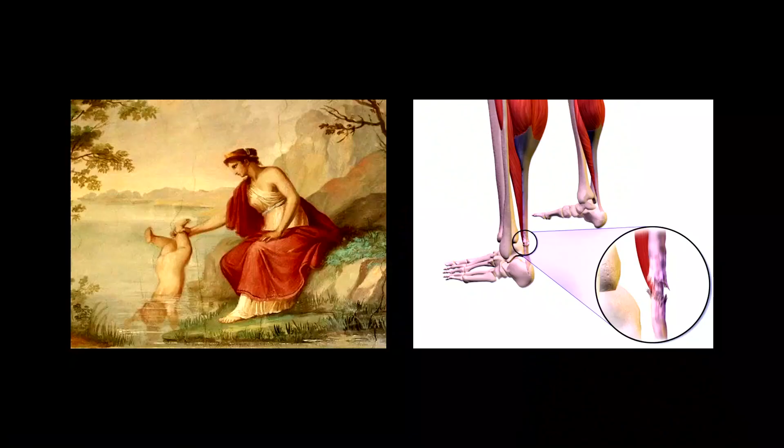Well, it's a pleasure to be here. 40 years since I was a student sitting in your seats, and it's really a privilege to come back to SCI-Arc. So you might notice I'm limping. I tore my Achilles heel and a tendon the other day. It's somewhat ironic that I'm addressing resilience with a frailty and a vulnerability.

It's appropriate that this Achilles, shown there on the left, I had to look it up. I mean, we all know the Achilles heel, but the great warrior Achilles was dipped into a river by his mother to give him invincibility and invulnerability. But where she was grasping at the ankle, he was not able to be wetted, and therefore was not invincible on the heel. So I thought that one spot of vulnerability is interesting.

It's been said that vulnerability is a birthplace of creativity, so it's fitting I speak to you in this creative community. The relationship also between myth and religion and constructs, which are the domain of humans, and science, which is the domain of humans understanding scientific facts in nature, is interesting. These disparate elements are also appropriate to the topic of how we often address life on our planet and how our built environment affects climate change.

From a science perspective, my tendon tear is a degenerative maladjustment due to inappropriate allocation of stress over time and in between stresses—essentially a structural failure due to excessive stress. Whereas anti-fragility would have taken the more reasonable allocation of stresses over time to build muscle mass instead of bringing this to the elastic limit. These stresses would have created a beneficial outcome. Too much stress on a system creates a failure. But you're learning this in structures class, that for equilibrium to exist, the summation of opposing forces must equal zero.

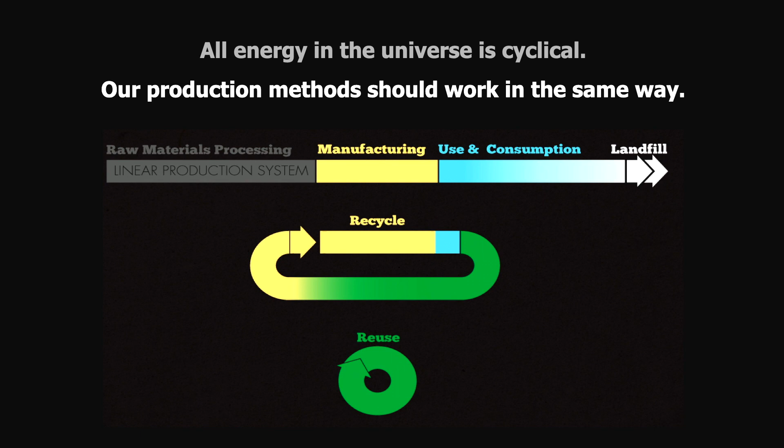Of course, a circular economy is a model of production, consumerism, and consumption, which involves sharing, reusing, repairing, refurbishing, and recycling existing materials as long as possible, rather than extracting new materials. So like biological nutrients in nature, our waste could also be used as technical nutrients in a regenerative, continuous system.

As it is for systems, it is for people. To survive in the future, humanity will need to adopt principles of circularity and systems thinking to develop materials and processes that are more organic and nature-based rather than synthetic.

It helps to use systems thinking, I think, rather than thinking in disparate parts. Systems thinking is a way of making sense of the complexity of the world by looking at it in terms of wholes and relationships, rather than splitting it down into disparate parts, enabling systems change.

Now, of course, buildings represent over 40% of global energy-related CO2. Now, I think in our lifetime, we've identified that the planet is sick, and that's the first thing—to identify the illness—and now to come up with solutions.

And certainly green buildings have been less bad by things like LEED and so forth, but we need to actually do more than reduce. We need to actually move towards restoration.

These reductions are certainly helpful, and we've made great strides in the creation of green buildings, but ultimately our buildings should give back more than they take. And I think that's a reasonable assumption that our technology can do that.

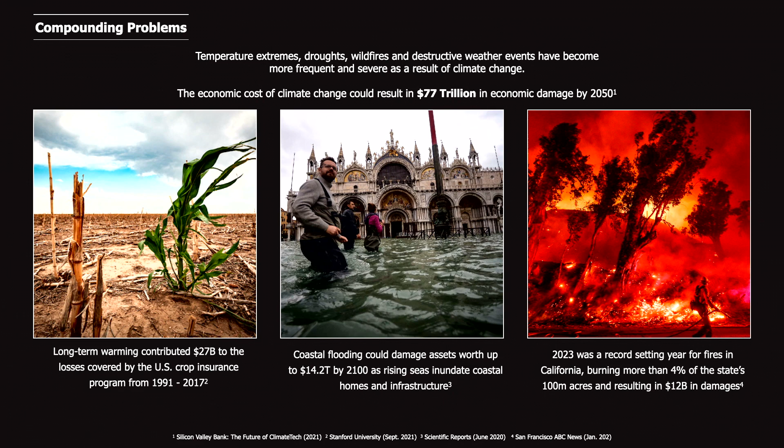So of course, we've had compounding events, and these magnify the intensity of climate change worldwide. Every year we hear we're breaking another 100-year flood. Every year, historic fires, unprecedented droughts, and they've had a cumulative impact and effects that are exponential in their repercussions.

We need to act now as CO2 levels continue to rise. 1.5 Celsius was the Paris Accord number. Now, these are happening at a much faster pace, and all scientists agree that is an inflection point in which it's going to be much more challenging to reverse climate change.

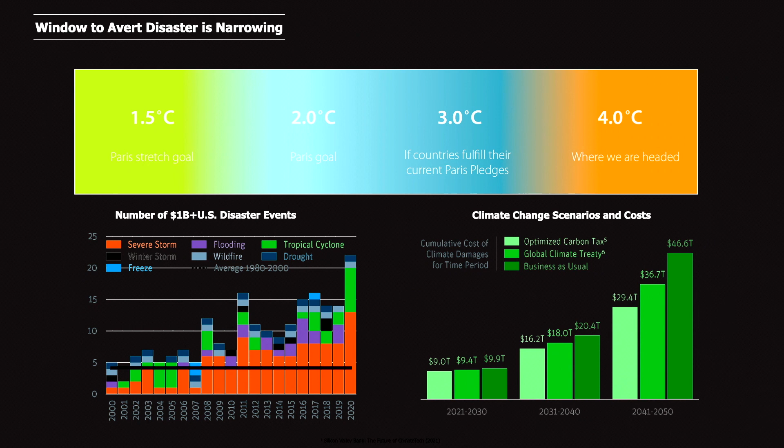And we're heading at this point faster and faster, possibly within the time you even finish your degrees. So the question really is, are we going to be a self-terminating civilization? I mean, there's been five mass extinctions already on the planet.

The dependency, of course, of water and food and energy are very clear. So I think we have an opportunity at this point, and it's a critical time. Never has the world been more vulnerable to our species.

The resilience imperative, the ecological imperatives of the 21st century, demand nothing less than an overhaul of our entire infrastructural systems and the way in which we design the future in an age of unforeseeable disruption. And so this is where you come in.

I'm going to speak more about this later, but I wanted to season the terms early in the presentation so you can marinate on them. Fragile systems are damaged by disorder. Resilient systems are unaffected by disorder, and anti-fragile systems benefit from disorder. So the anti-fragility of the whole often depends on the fragility of the parts of a system.

These terms, resilient, restorative, and regenerative, are such important terms. They're pathways. Indigenous cultures are the progenitors of a regenerative future. Regeneration means stitching together the broken strands that separate us from life and one another. That's a quote from Paul Hawken, an amazing author and visionary.

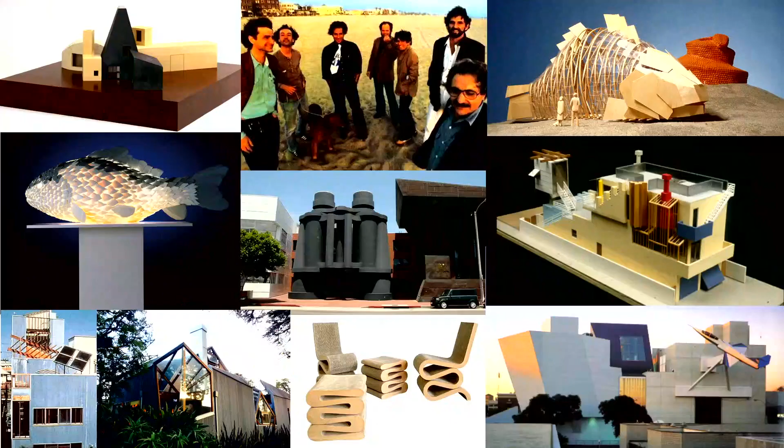I won a scholarship at SCI-Arc in my senior year to work for Frank Gehry, and worked in the Venice studio.

This group, known as the Confederacy of Heretics, on the beach there is Fred Fisher, Robert Mangurian, Eric Moss, Coy Howard, Craig Hodgetts, Thom Mayne, and of course Michael Rotondi, who's here tonight also, are incredibly inspirational.

These are some of the projects that I worked on at Frank's office - consistently different projects, a big push for the '84 Olympics, for the Aerospace Museum, but also breaking up color core Formica, and Frank's fascination with fish scales and snakes and other forms were very interesting, as well as his furniture work.

I also had the opportunity while living and working in Venice to work for different artists. So Larry Gagosian's gallery, designed by Craig Hodgetts and Robert Mangurian, shown in this upper left, was home to Jean-Michel Basquiat, and my job was to build stretchers for Basquiat and work with him for a summer, and it was quite an amazing experience.

But I also worked with Chuck Arnoldi, De Wain Valentine, Robert Graham, and full circle, I later purchased the building, the brick building right next to the Gagosian Gallery, as our architecture firm.

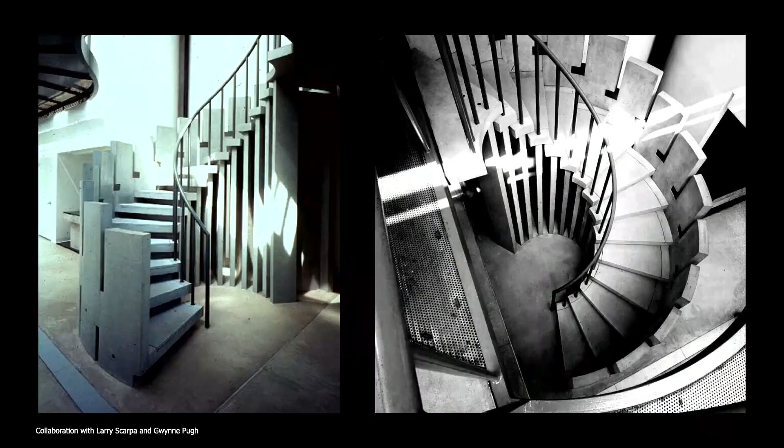I got to work with Morphosis on several projects. Some of my fondest memories are sitting with Michael Rotondi, watching him sketch and ideate, then fabricating some fixtures. This is a stair I did with Larry Scarpa and Gwynne Pugh, all prefabricated pieces.

But ultimately I began to feel the weight of my footprint in manufacturing, and it was somewhat of a reluctant product. I really started making things because I was looking for material that didn't exist in the market, and then got driven by the market into a larger entity that I felt run by.

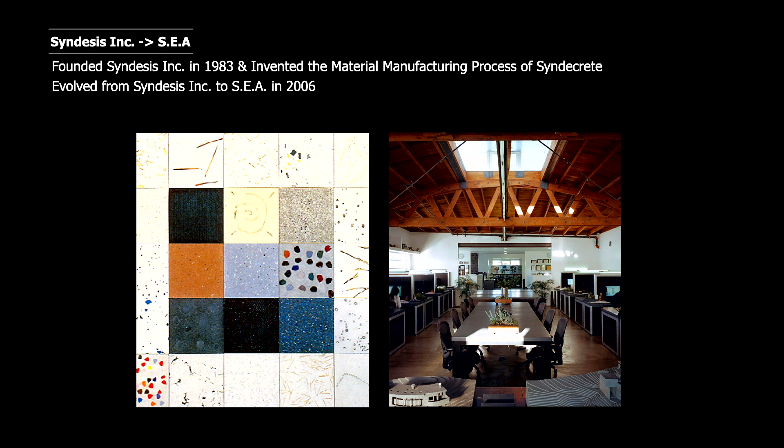So I sold that technology in 2006 and said I'm going to use the proceeds from that sale to continue practicing architecture until that money's all gone. Yeah, that's what it takes to practice.

So I started to focus primarily on how do I limit my footprint, and how do we create this sea change, alteration, or transformation. The work again became small scale, and the scales flexed - there's a little tiny trophy we designed for the World Surf League, and this is a launch control facility for SpaceX.

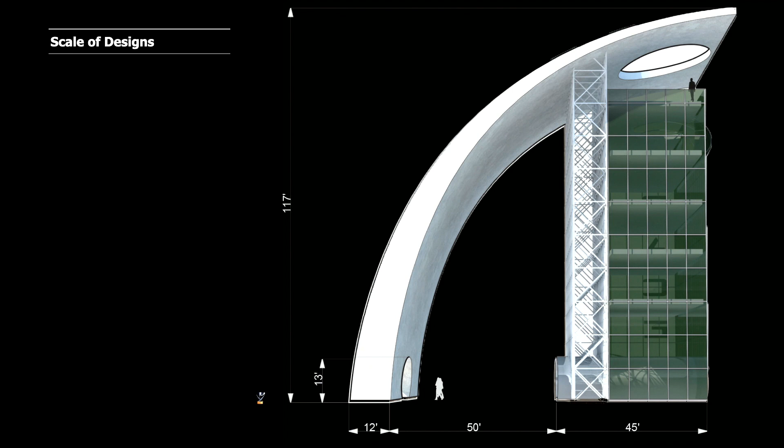So the scale of work can vary, but the general tenets are indoor and outdoor spaces, blurring the definition between indoor-outdoor to experience nature in a building, or when possible bringing nature into the building, either with a vegetative wall or a roof.

I'll go through a couple projects quickly since there's a lot and not much time. This is the first project I did in school, collaborating with Michael Rendler, who's here tonight. We drove after school on Fridays out to the desert outside of Reno, Nevada, to help build this house - a 55-acre site, passive solar, 100% off the grid. Until last year, the client occupied it, then passed away there.

This is an example of an early project. I was about 21, and we show it from far away because the contractor completely messed it up - the detailing was appalling. But that's one of the lessons you learn.

The second project, also with Mike Rendler, was an artist studio in residence in Venice. It was somewhat unique at the time because people weren't really using unfinished stucco, concrete, rusted steel, and block - it was somewhat of a fortress that then opened up inside.

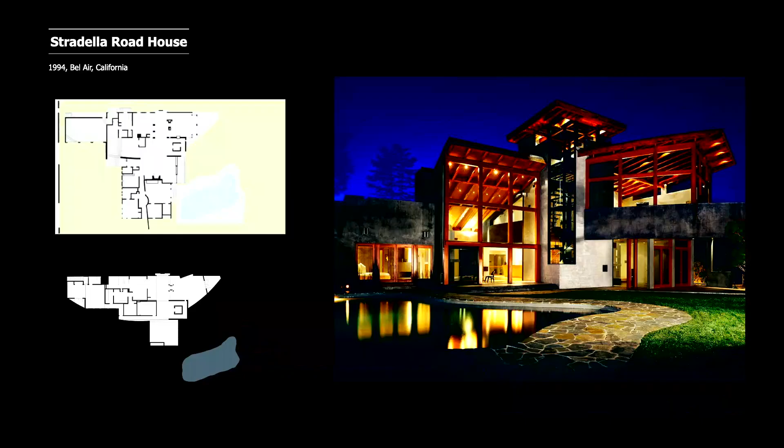Another project in Bel Air used a large gestural form to make a house out of reclaimed lumber and sustainable systems, including a solar chimney.

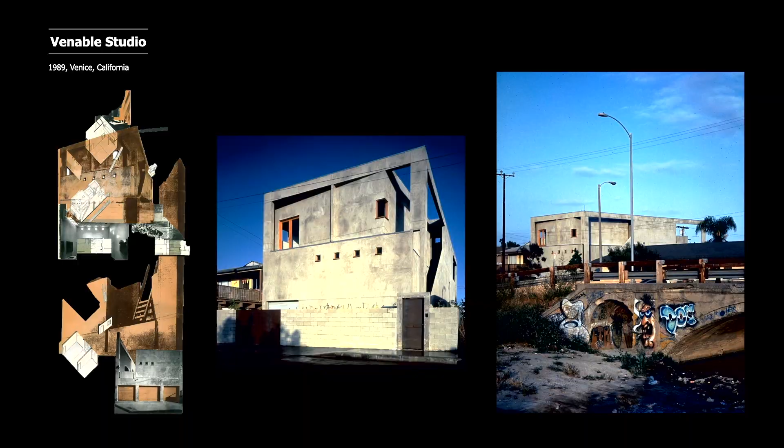A lot of the work also thinks in section, and thinks about the principles of natural airflow and ventilation, the use of a courtyard, the use of a bridge.

In this house, called the Californication House, I designed and built for my family, it was used as a principal residence in Californication. The other project featured was one of Ray Kappe's houses, so it popularized contemporary architecture in a way.

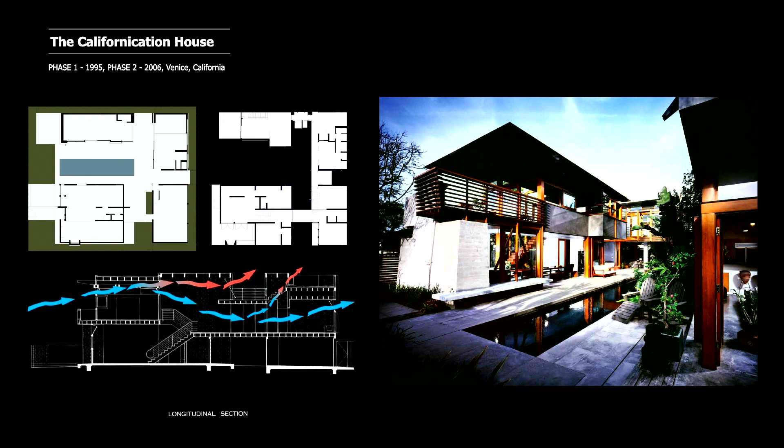It was built over two phases when land in Venice was inexpensive, and we built every aspect of it within our shop - furniture, fixtures, cabinetry, Syndecrete. It was about trying to create somewhat of an oasis within a small urban environment.

You could see elements certainly of Schindler and Kappe in terms of the use of reclaimed timbers. It also incorporated bridges, courtyards, natural ventilation, rammed earth, solar hydronic heating, and even living roofs.

A lot of the projects in Venice, this is a 32 by 80 foot lot, are so small that it's going to be a box. And how do you decorate the box?

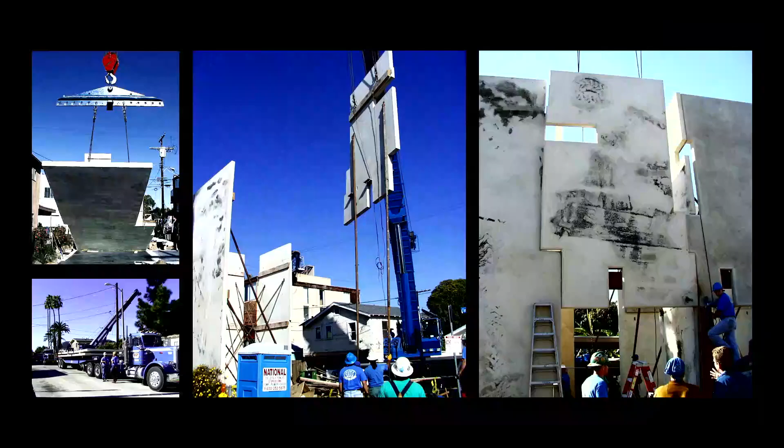So this is a project that was more tectonically inspired, and because I had so much experience with concrete slabs and pouring concrete slabs, I wanted to experiment with a house made out of prefabricated concrete slabs.

So 15 slabs came on trucks. They were cast off site only days before, trucked up. When the neighbors went to work, when they came back, all the walls were standing. It was one day, all the slabs were interlocked together.

And so these slabs could cantilever vertically. They were very, very durable, and they're made out of a titanium dioxide self-cleaning concrete that exfoliates over time as it gets dirty.

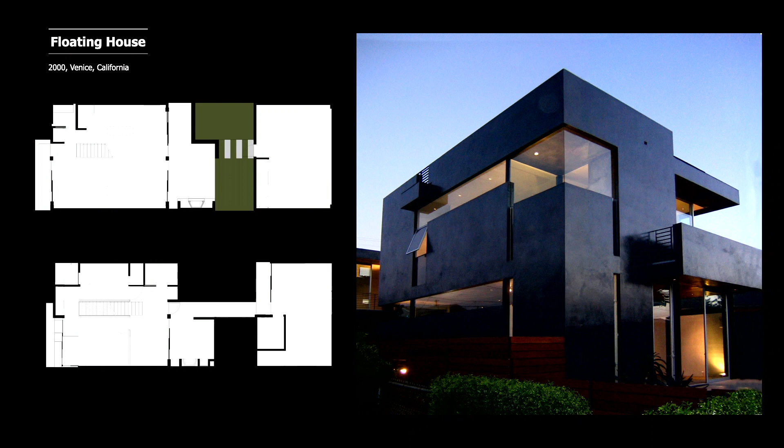Another box, let's take it as a solid mass and then make reductive gestures to carve away at it such that it essentially becomes floating.

It's connected between a bridge or breezeway around a large pepper tree, and we've just finished a renovation for clients that have restored it back to its original condition and bought it as essentially vintage and wanted it back.

But the idea was to have continuity of materials from outside to in, so the very polished steel troweled stucco ceiling comes out. So again, it has a cast monolithic feel.

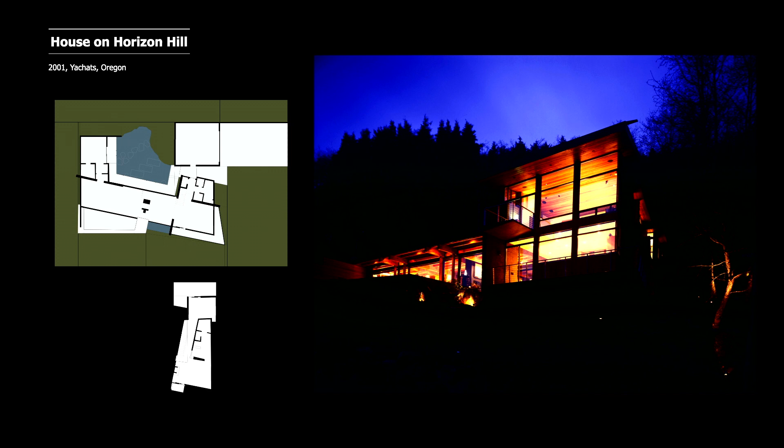In a house on a rural site in Oregon, on the Oregon coast, in a temperate rainforest, I designed a house out of concrete that we made on site using different variegated river rock, bonderized sheet metal, wood — all these materials to withstand 120 mile an hour horizontal wind-driven rain off the Pacific, but also that integrated into the landscape and inspired much by Japanese courtyard houses.

The water flowing down the hill actually accumulates and then continues underneath the entire house undisturbed.

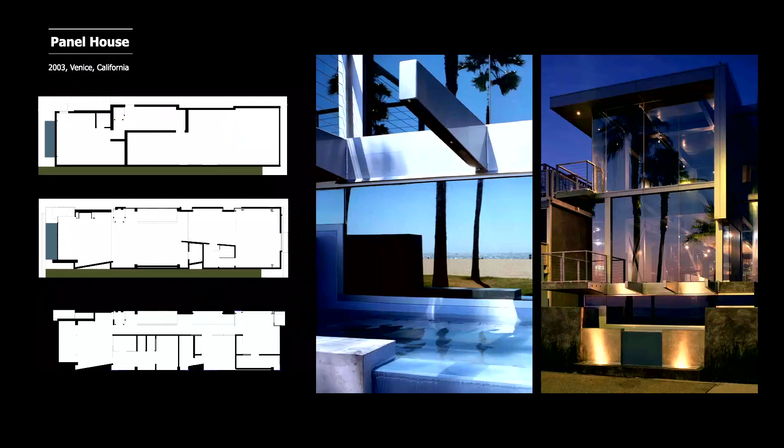Another, in this case, Venice oceanfront walk property, a very long and narrow property. The goal was to open the house even from the back all the way to the view and to really experience the ocean.

And so this window that you see here on the right is on a custom screw jack. The screw jacks can lift and lower the window, and then inflatable seals are used to seal it against the wind-driven sand. So here you can see the window comes down to a railing.

And sometimes I've been riding by on the Venice boardwalk, seeing my client who has the biggest suntan of anybody I've ever seen, because he sits in his living room in the sun throwing footballs through the front window to passersby on the boardwalk.

But the house was made out of a refrigeration panel system of insulated stress skin panels skinned in aluminum. All of these panels came on a truck.

The structure itself was post-tension concrete and steel, and then the walls have no bearing capacity. So they went up very quickly.

They're coated with a Kynar marine finish and still holding up quite well.

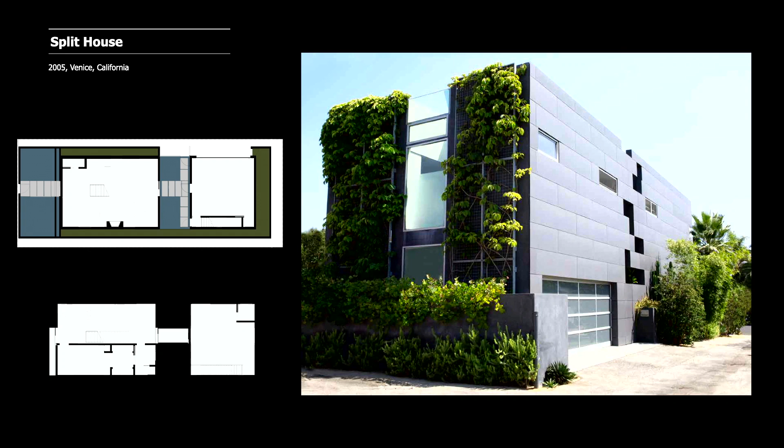In this case, splitting it down the middle to create essentially a continuous skylight and vertical window, playing with cementitious panels, and then covering the courtyard to the adjacent street, but taking away the pieces such that there were views from the breezeway that connects them and the water court below.

A house that is an addition to a Gerald Lomax house. Jerry Lomax worked with Gregory Ain. It was a very orthogonal modern house. And so to honor that work, I wanted to make a distinctly different addition that sits on top of it.

And so I used more curvilinear floating roof forms and pushed the building out with frameless glass such that the client in that bedroom was really connected to nature.

And I feel from all my early work in the Syndecrete days, building bathtubs and showers out of concrete to bring them inside and outside, was to have something primal about bathing that connects you back to nature and the natural world.

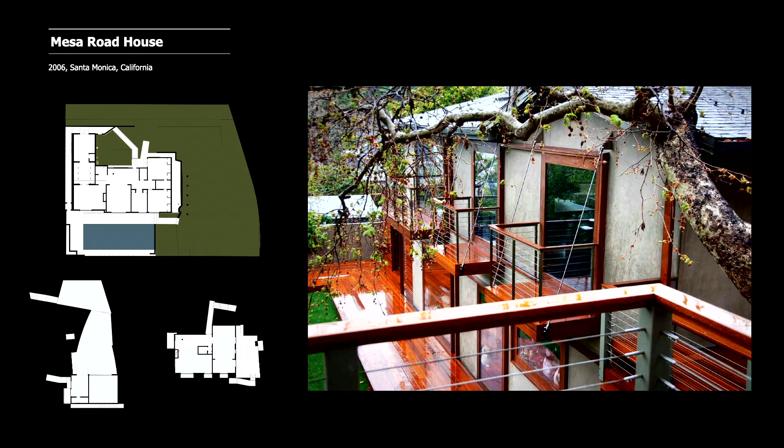In this house in Santa Monica Canyon, it is completely based upon an existing stand of sycamores and how we could make it feel like you're living within a grove of sycamores, made out of FSC certified and reclaimed hardwood, designed the front door.

This house was built by Epic Construction, and the panel house was built by Ron Senso. I've worked with these craftsmen and builders off and on for different projects. Here's a sink designed out of wood, a folded ceiling plane, and millwork as well.

In 2007, after I sold my Syndecrete company, I bought a little abandoned Mexican restaurant and market right on the corner of 20th and Olympic, and renovated it for our office. It was the highest rated LEED Platinum building in the country at the time.

It became a laboratory for me to experiment with passive ventilation, active daylighting systems, and solar generation, as well as to work with the green roof.

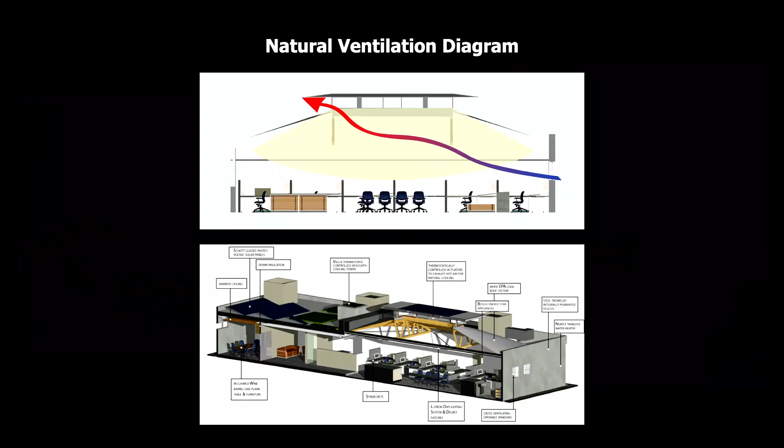We created a green roof research station that became the formative research for the California Academy of Sciences building in San Francisco. We played a lot with how you shade green roofs using solar, cool the solar panels to increase efficiency, and use reclaimed water to wash the panels down, which then waters the green roof.

A Buff and Hensman case study house restoration down to the foundation, and an addition.

A project for the Thacher School, a private school in Ojai, done in collaboration with Yato Suzuki, who I think is also here tonight. We've been collaborating together for about 20 years. This property had about 32 dormitory rooms, commons, and faculty housing.

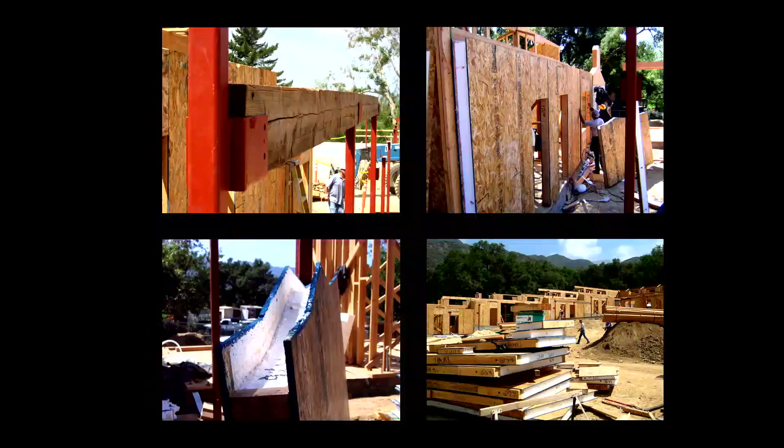It was made out of reclaimed timbers and stressed skin panels. The whole building was prefabricated—doors, windows, roof, walls—and it was also solar radiant heated, which is still one of the more comfortable dormitories, I'm told, from back when Howard Hughes was a student there.

In this project, there was a very typical tilt-up concrete building. My aunt and uncle—I believe my Aunt Merle made it through traffic tonight—she's still racing and showing cars around the world, but has a collection of French race cars that really preserves this art of motion.

I used the inspiration of reclaimed windshields to form a canopy, reoriented the building on its axis, and then opened it vertically with stairs, utilizing solar on the roof and a green roof for entertaining.

So like our planet, islands make you very aware of the finite boundaries.

This was a project in the Marshall Islands, very remote and intact. It's in fact one of the most pristine ecological regions because it was one of the most polluted ecological regions from nuclear tests by Bikini Atoll.

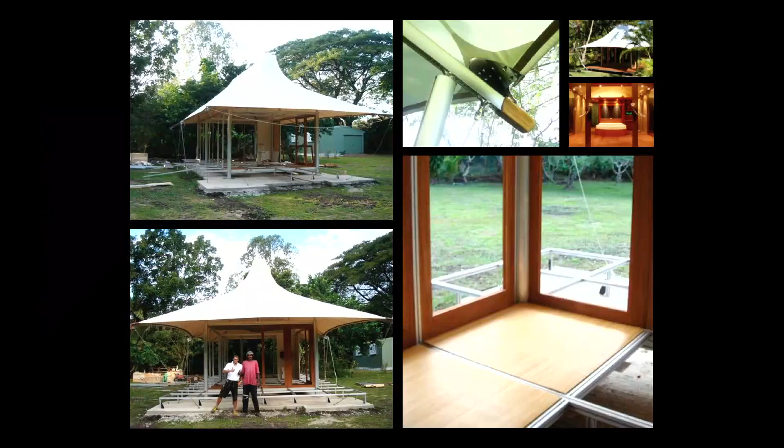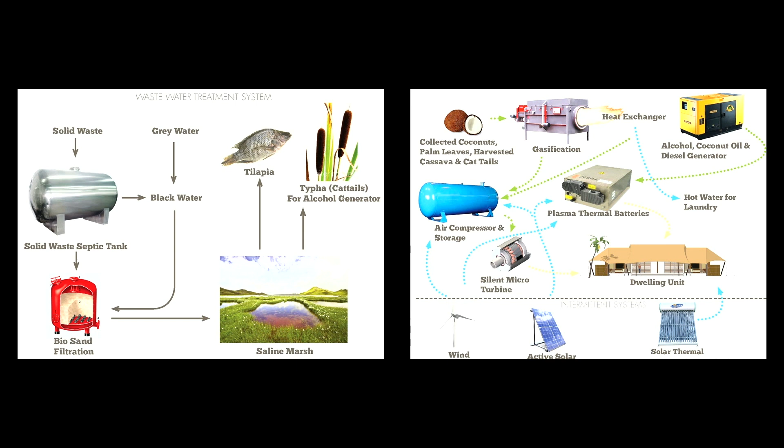Prefabricated aluminum pieces and tensile membranes capture 100% of the water and employ 100% of the waste in an ecological system, generating power from the biological materials available on the island—coconuts gasified to make heat, which then run pneumatic turbines to power the buildings.

I've also been very interested in radical reuse and repurposing. This was for a marine mammal rescue facility at the base of Dockweiler Beach.

I was interested in the thousands of battleships that are desiccating and exfoliating their lead and toxins into the San Francisco Bay. They're chained together, and in researching what to do with some of these ships, I found a floating barge that was used for the Glomar Explorer—a stealth ship called the Sea Shadow.

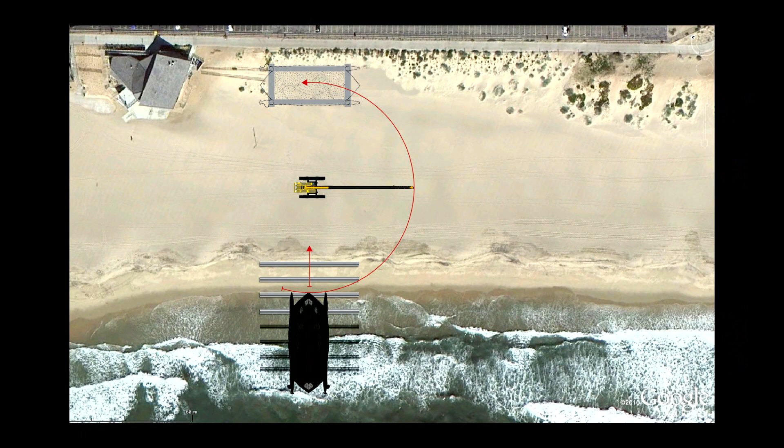This was being sold for salvage. My concept was to purchase that ship, bring it down to the beach, crane it into place, and elevate it so it would work as a marine animal facility at the bottom and offices up above at night, giving you the stealth-like form against the horizon.

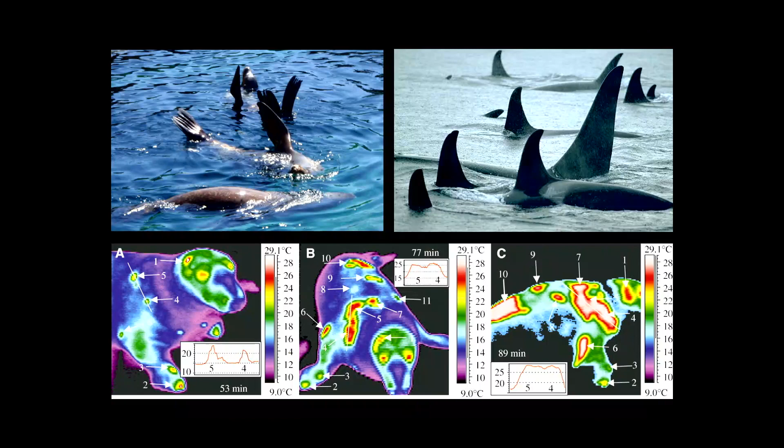I was inspired by thermoregulation, which marine mammals use to regulate their temperature—they use their dorsal fins to either gain heat or discharge heat. That became this rudder, a movable rudder that would in part self-regulate.

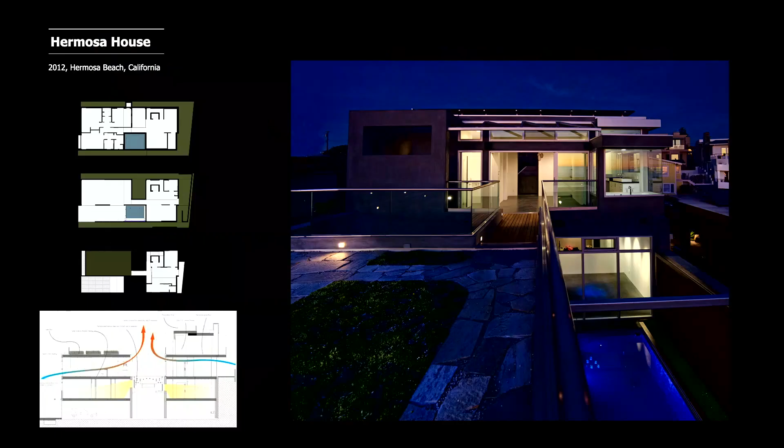Going quickly through a couple of these other houses: in the house in South Bay, we craned a stainless steel swimming pool into the third floor and opened that up to the bottom, trying to still make a very tight urban house somewhat open.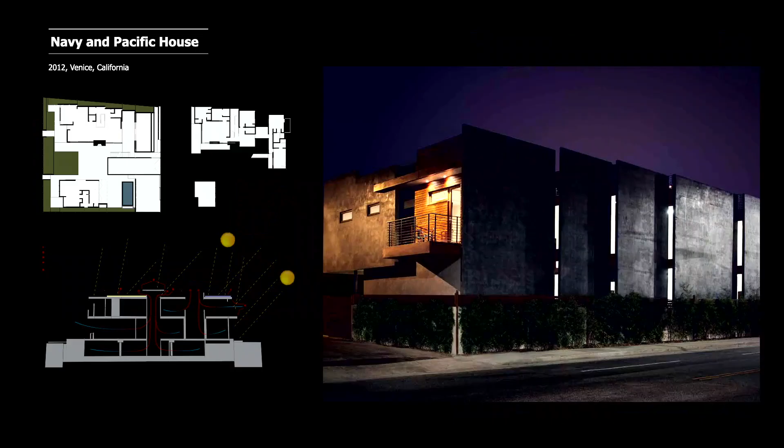Another house in Venice becomes somewhat of a gateway—it's the first house in Venice on Pacific and Navy. The idea was to create a series of fins, a very solid wall on this very loud street, almost like fish scales or shark scales, seen one way as monolithic and another as variegated, allowing light through.

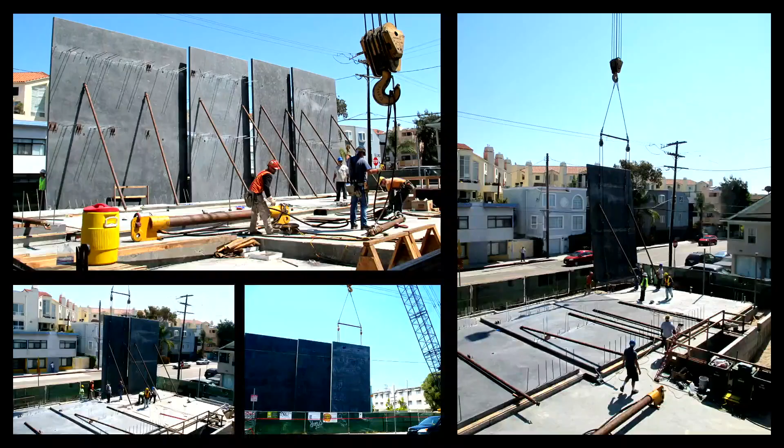In this case, we had enough room because we built a subterranean garage, then poured the slabs on that garage and tilted them up, and built a house which was far less solid and open to a courtyard as it extended inside.

Now it's clad in bamboo and one doesn't even know they're on that busy intersection.

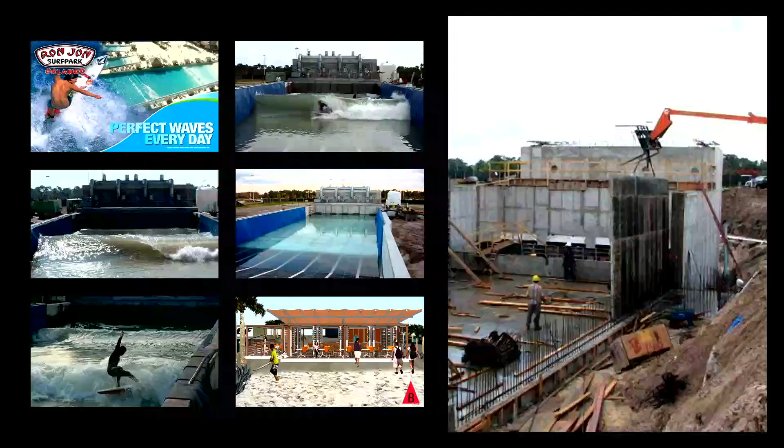I had some interesting opportunities working with the 11-time world champion surfer Kelly Slater. He bought a patent for an endless wave in a circle, so I did some visualizations on what that could be. Then for another company, having this unique experience in man-made waves, we built a test pool for one in Florida. The idea was similar prefab structures that would support it, but also use the wave energy for harnessing power, to use solar energy to cool surfaces and heat other surfaces. So I became very interested in the systems around that.

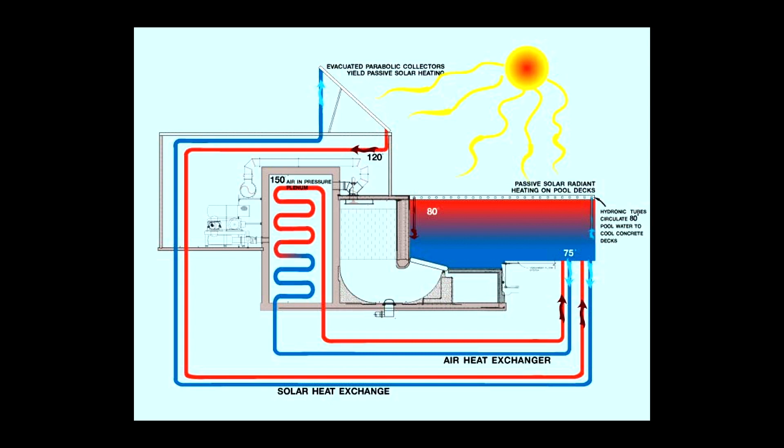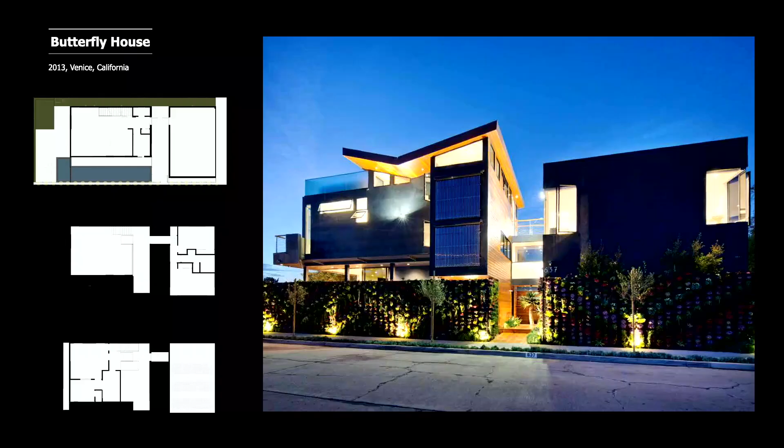Last year, I got to surf this man-made wave in the middle of the California desert. That was quite interesting—man utilizing technology to recreate nature in some ways, but not as an alternative or in place of nature, but as an augmented nature. A lot of my work tries to make overt expressions of mechanical systems, or to still make spaces that open up to the outdoors or interior.

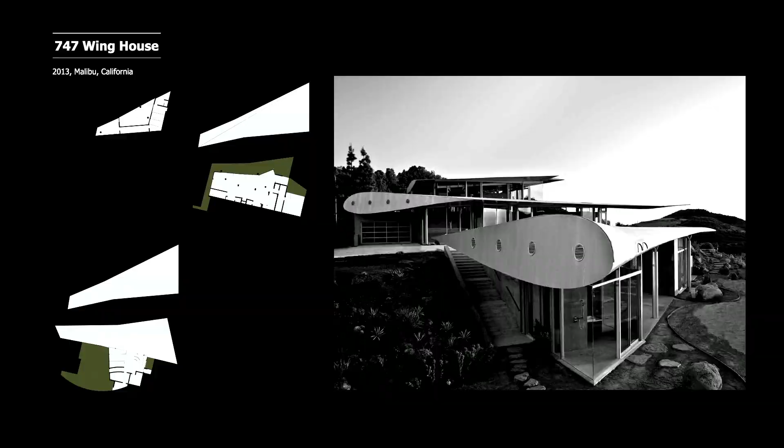So the process of radical reuse and repurposing, we talked about a little bit. Upcycling is, instead of something that's downcycled. In this case, a property in Malibu—my client, Francie Rewald, is here tonight, and to her credit, allowed me to generate a concept about floating wings. The initial idea was to just have these Lautner-esque wings, and then I thought, why not just use real wings? This cross-section reminded me of the laminar flow shapes.

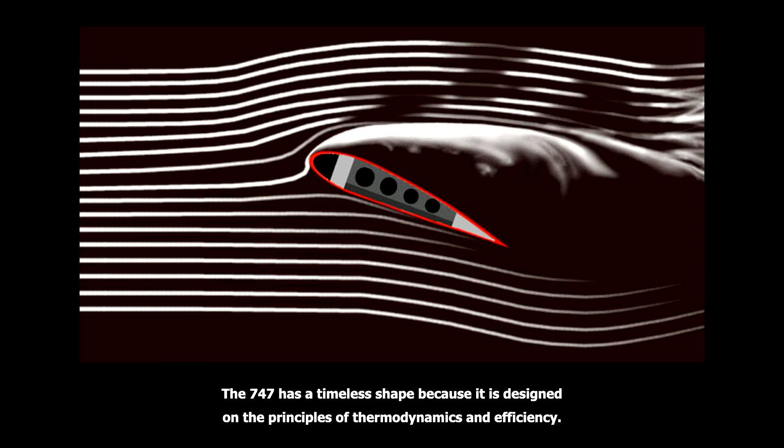A 747 is timeless, especially compared to anything else of its era, because it's shaped by the laws of thermodynamics and efficiency. It's an incredible structure—Norman Foster really refers to the 747 as a building. But when you think about the billions of dollars of research and engineering that go into making something so efficient, lightweight, and strong, it's a shame to have it downcycled into a beer can when it could be reused as a building. There are thousands of these airplanes desiccating in the deserts of obsolescence in California. I remember seeing them, perhaps you've seen them too, as you drive on the 395 or out of Mojave.

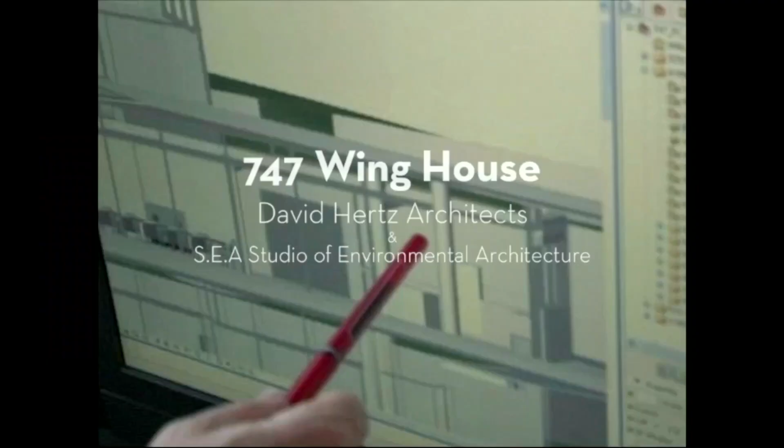So I convinced my client to buy a 747, and to her credit, she did. She said, let's go look at it, and we went out and looked at it. I'll show you now, because it's easier to describe this way—we clipped together some video footage and sped it up. It's a little slapsticky, but it goes faster that way, and it does show the process of making this building.

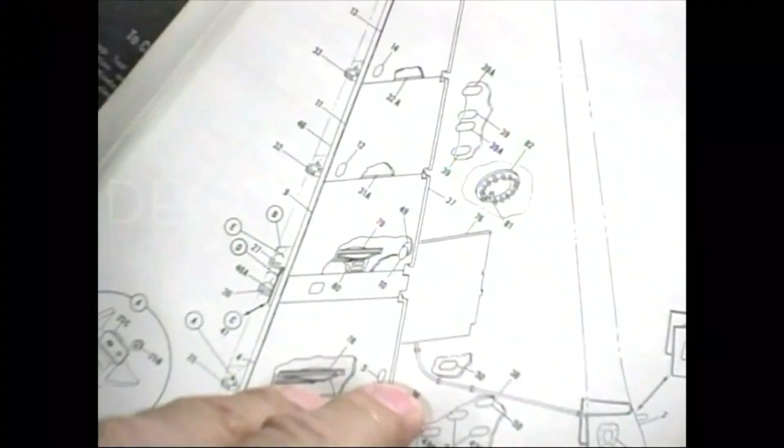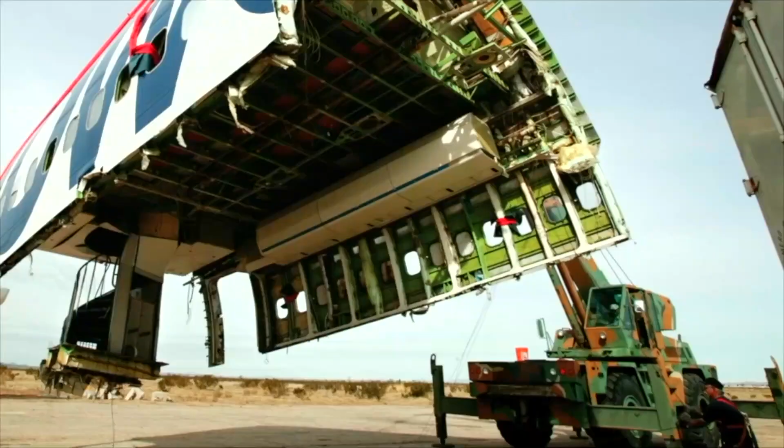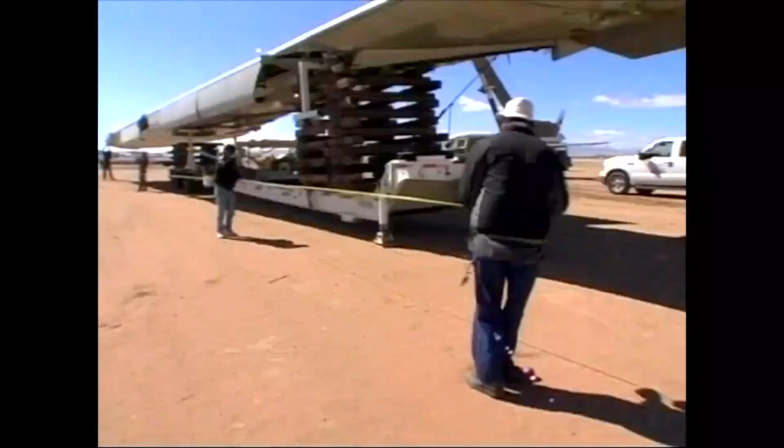The idea basically is that these wings are like tabletops. This Tower Air plane was a 1977 747-200, set for demolition. We cut it in half lengthwise and then lifted those fuselage sections off—we actually were drilling the piles on Friday for the fuselage building on the property. We then took the wings, rigged them for transport, closed 5 freeways, and took them to the Camarillo Airport, where we cut them in half, closed the runway, and used a Sikorsky Sky Crane helicopter to bring them to the remote site.

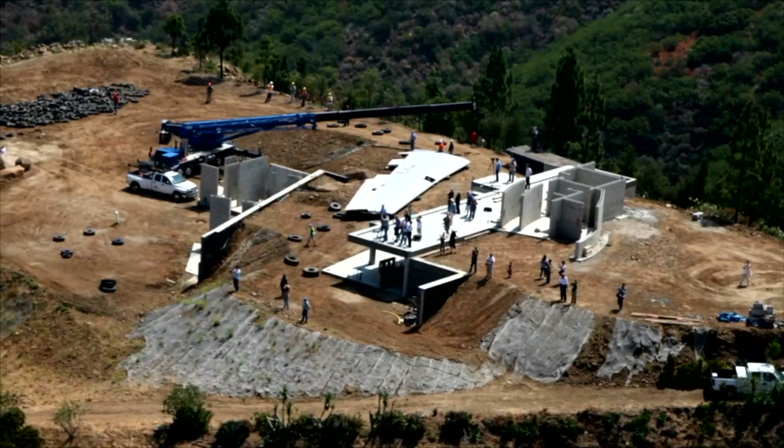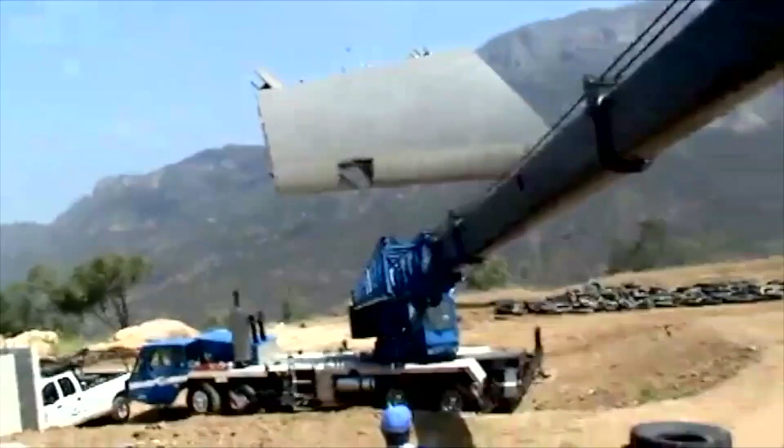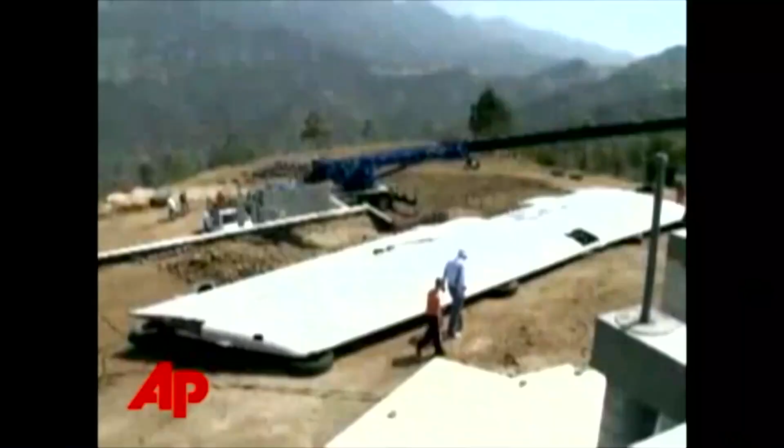Now, one would say, how is that environmental? It's a huge burst of carbon in a two-hour time frame—so it's a large inputs, less time strategy. This site is very remote. If we were going to make this as a conventional building, we'd have thousands and thousands of trips of disparate pieces that would come, none of which would fit, and 30% of which would end up as construction and demolition waste. So this idea of repurposing rather than usurping primary raw materials from the planet—especially aluminum, which has one of the highest embodied energy costs with the largest life cycle cost.

So the finished project—I'll go back quickly—but that's also perhaps best seen with video, because like Lautner would say, it's hard to photograph good architecture because it's a dynamic experience, and the interplay between the roof forms is part of what makes it so interesting.

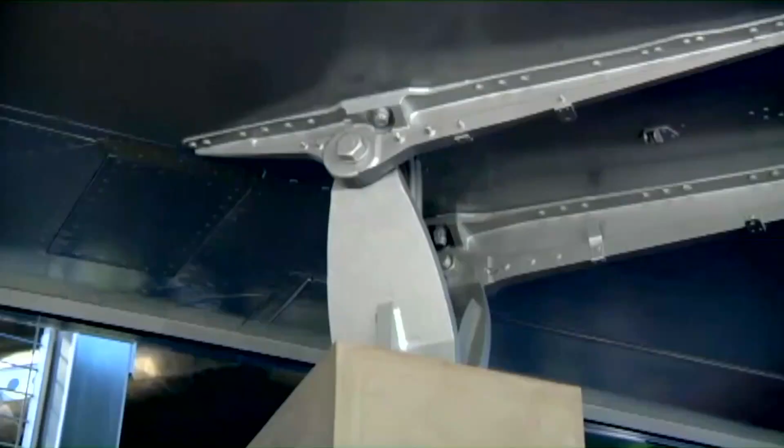The wing starts at 8 foot thick as it hits the root of the plane and goes down to an inch in thinness. It's an incredibly graceful and strong monocoque structure, and we employed it so there was an interplay between the wings - the lower guest wing, the main wing - and the primary bedroom is made from the horizontal tail stabilizers. We reached up and grabbed them at the engine mounts of the strong part of the wing, and expressed that hardware and the finishes - the rivets, the polishing of certain surfaces, the painting of others, the leaving of other portions of the wing.

The engine cowling acts as a fountain with a fire element to form a courtyard, and the wings make a forced perspective towards the horizon, towards the Channel Islands and the sunset. Because the property is on a ridge, it integrates very nicely into the ridge, but also gives you the feeling that you are flying, because you're looking out over the wing as you would as a passenger.

So it speaks to recycling, radical reuse, but as a progenitor of form. Not, oh, we'll put a solar panel on it, but really, how could that become the basis of design?

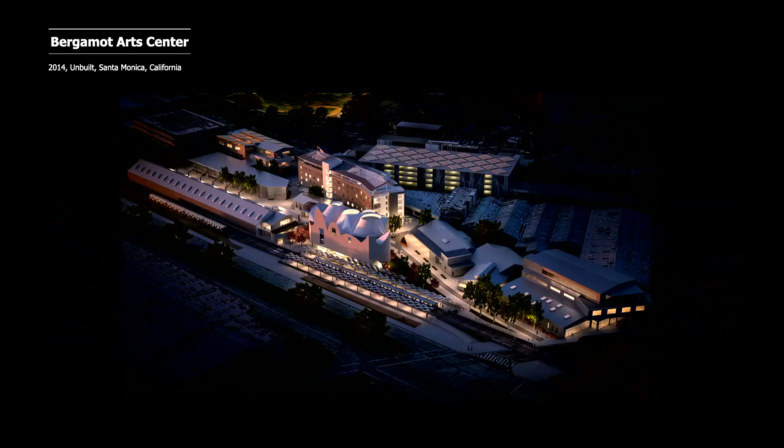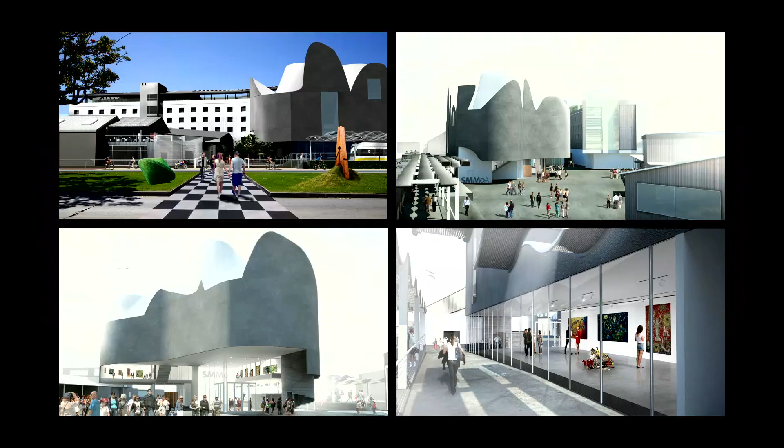Another project, unbuilt - I was shortlisted for an art center in Santa Monica, the Bergamot Arts Center. It was to include a hotel, a new museum, parking, and artist housing. I collaborated with Michael Maltzan, who did this beautiful floating design for the Santa Monica Museum to address the Metro Rail. So it's essentially a Metro Rail stop where art is just viewed right from your seat in the Metro Rail, which then encourages you to get off.

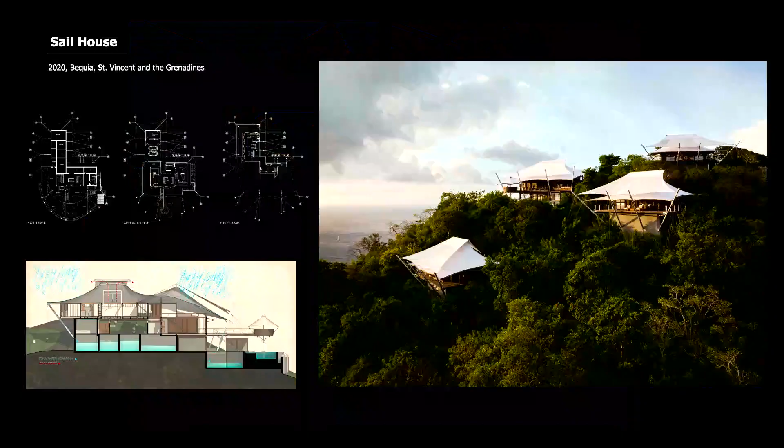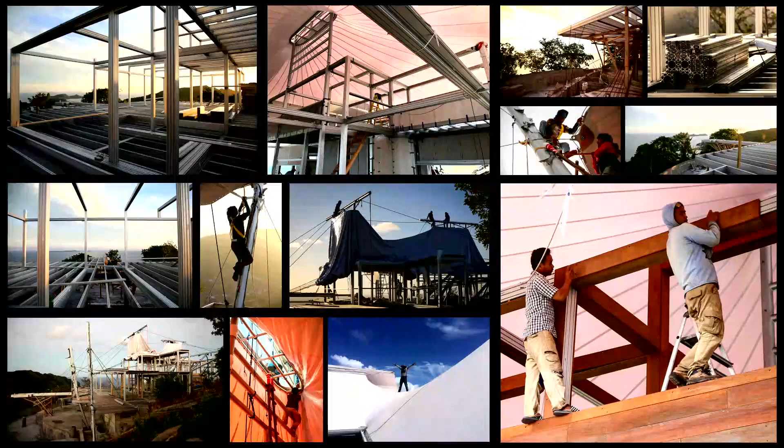As we wrap up, I've got a house I recently finished on the island of Bequia—an incredible house. In a perfect world, architecture lets you work with amazing clients who give you latitude and involve travel and other experiences. We chartered a Phinisi, a traditional Indonesian vessel, found a pier in Borneo abandoned out of old ironwood, and designed the house out of extruded aluminum sections.

This island is very remote, near Grenada. My wife Laura and I sailed from Grenada to meet my clients, who sailed down from Bequia for the first time—we met on boats. Everything coming to this island arrives by boat, so the embodied energy is significant. How do you do that efficiently?

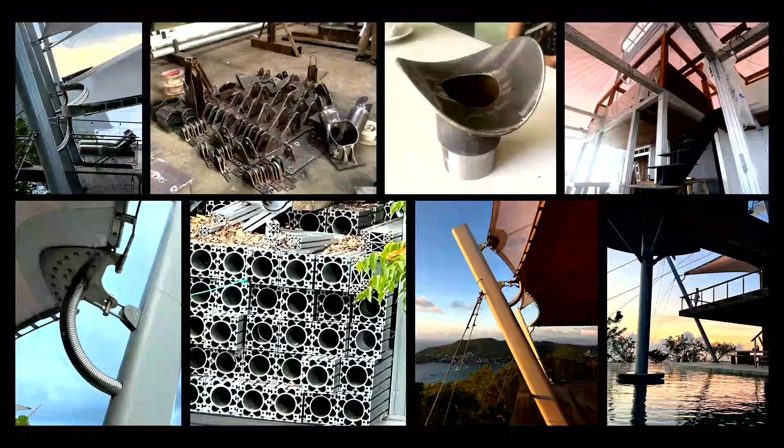Aluminum—recycled aluminum extrusions. There's no way to not make it square. They go together with one tool in a kind of flat-pack arrangement. There were 15 containers with very little empty airspace in them. They're clad with reclaimed lumber so they retain a wooden feel, but have a hollow aluminum section for mechanical systems. The entire building was built in Java and completely assembled—we went with the clients. Every light switch, plumbing fixture, and finish was completely assembled, disassembled, barcoded, shipped, and reassembled.

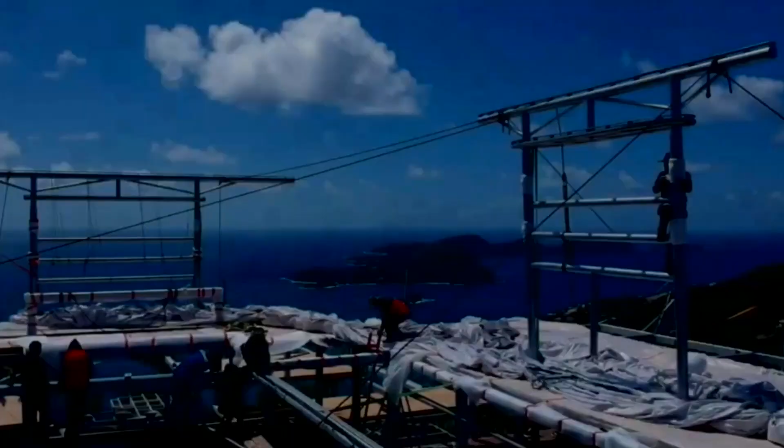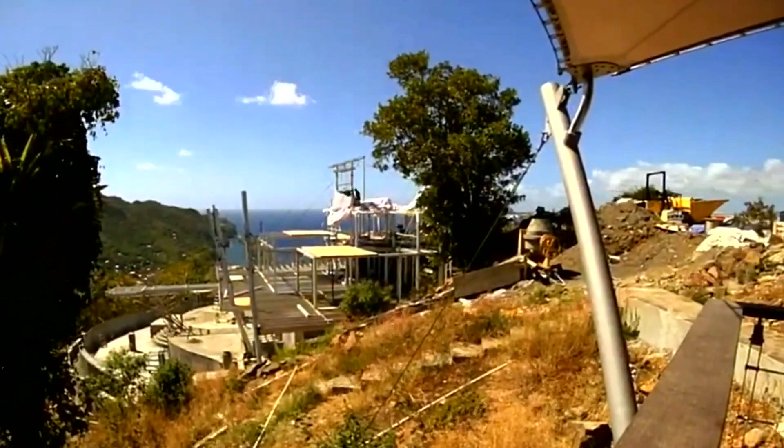The Javanese craftsmanship was amazing—the ability to use natural materials like woven palm and coconuts. We also have video showing the steel frames and aluminum structure. The entire building is resistant to termites and mold.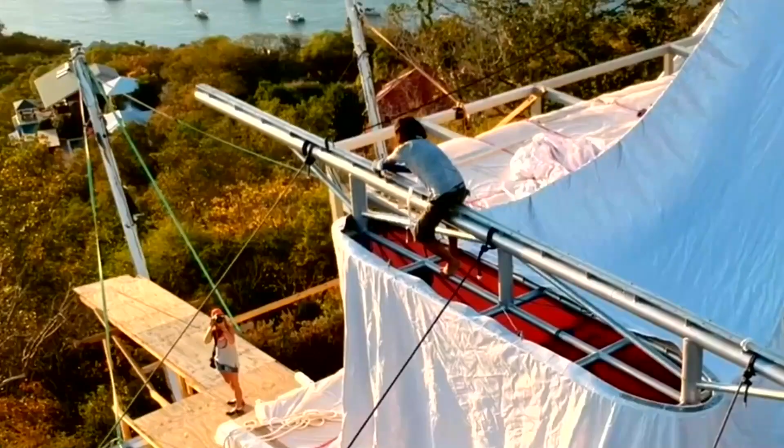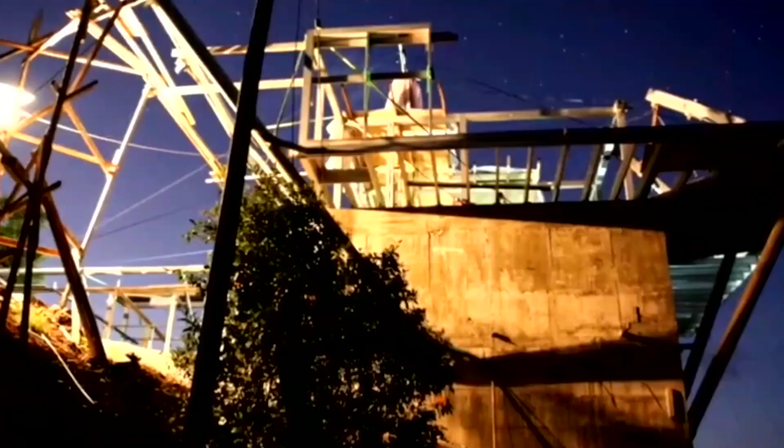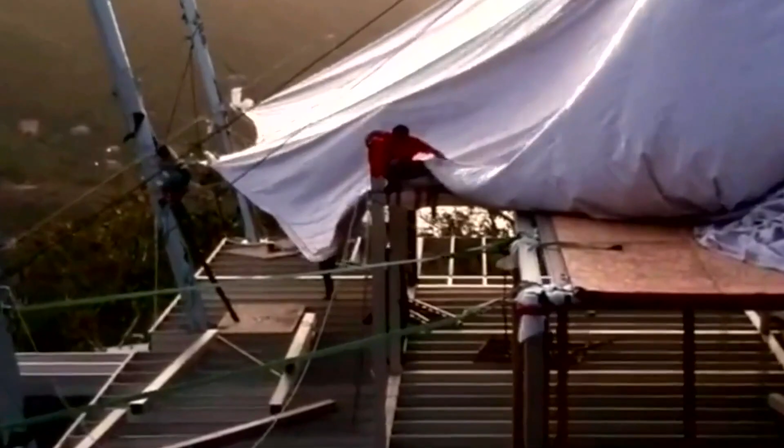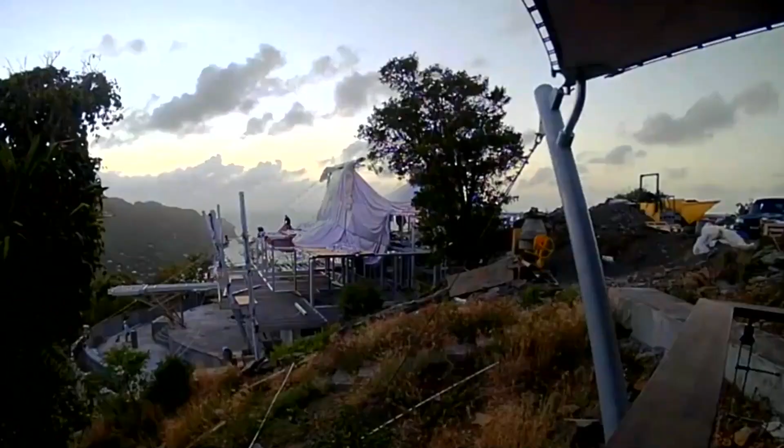It has a large roof area, needed in the Caribbean for large overhangs against the low sun. The roof took up very little space—it was unfurled much like a sail. Large masts were custom extruded out of aluminum, and sails were draped over them. Javanese workers worked alongside Caribbean workers, German engineers, and British clients in a truly international project. Eric Lindemann, who's here tonight, was the project architect—we've worked together for about 20 years. We also worked with Toma House in Bali, Stefan Schilly and Frank Toma. It was an amazingly collaborative and cooperative effort.

In terms of the roofs: there's no water and no energy on this site, so the roofs collect 100% of the water. They funnel it into the corners at the mast, and the water is brought into the foundation—a big hollow concrete box filled with hundreds of thousands of gallons of water. They get tremendous amounts of water in short periods and then none for long periods.

The long overhangs were created by a tensile membrane, with reclaimed wood sitting on top, which we also use to make louvers. The house is basically all completely open—no mechanical systems, all naturally ventilated, but it can be closed up with louvers directed for airflow. It's best seen from a drone; it integrates nicely into the landscape, with a large ironwood pivot door.

The series of buildings includes guest houses, somewhat like a bed and breakfast, looking out over the island chain. There's a large pool that's again 100% collected rainwater. The views and capturing the prevailing breezes make it very habitable.

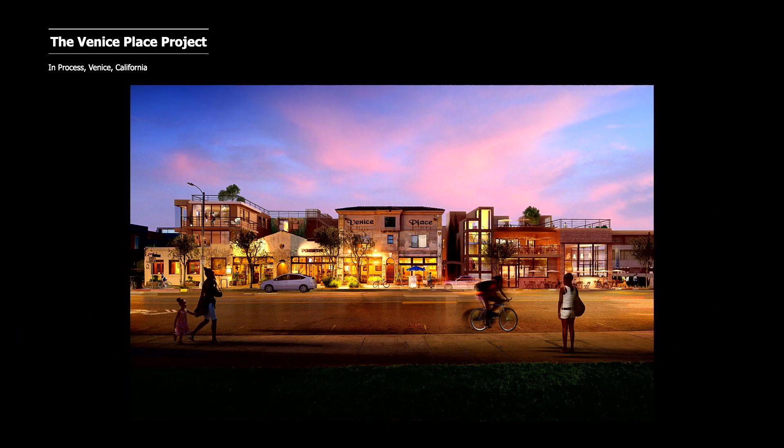A project just in construction documents now in Venice is a hotel on an old railroad right-of-way on Abbot Kinney. It seeks to open the restaurants to a large public courtyard and tries to break up the mass of the buildings into a series of buildings with courtyards and bridges.

Just finishing the NRDC office—it was the first LEED Platinum building in Santa Monica, and now it's being positioned for the living building challenge, 100% net zero energy. We have a floating solar canopy roof. Worked on this project with Ed Milan in my office.

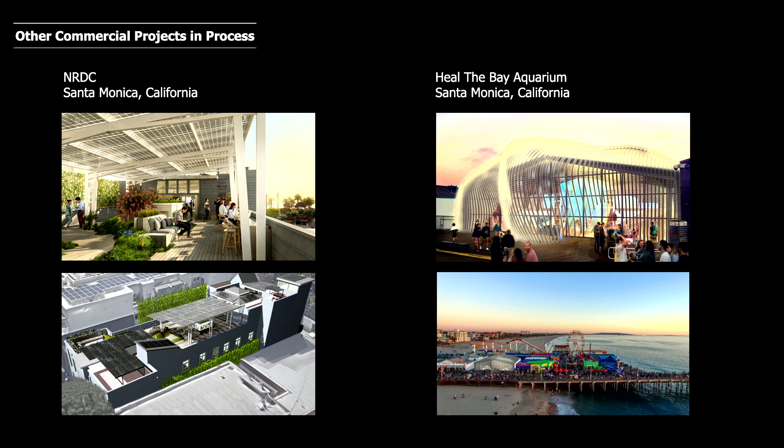I started playing with atmospheric water generation on the rooftop of my office on Market Street, hired an artist, and put in a bottle filling station.

My wife Laura and I started giving water away for free to the community during the middle of the drought. The idea is, why should the commons, water, be privatized and sold to us by corporations in plastic bottles where there's more plastic than plankton in the oceans? Why shouldn't water be free? It's about the democratization of water.

Around that time, the XPRIZE, which was in part funded by Elon Musk and Peter Diamandis—that's what got Lindbergh across the Atlantic, it's an incentive prize—asked: how can we take nascent technologies that have not emerged yet and make an audacious but achievable challenge? So the challenge was a global challenge of how to address water scarcity by making 2,000 liters of water in 24 hours at a cost of less than 2 cents, and it had to be 100% renewable energy.

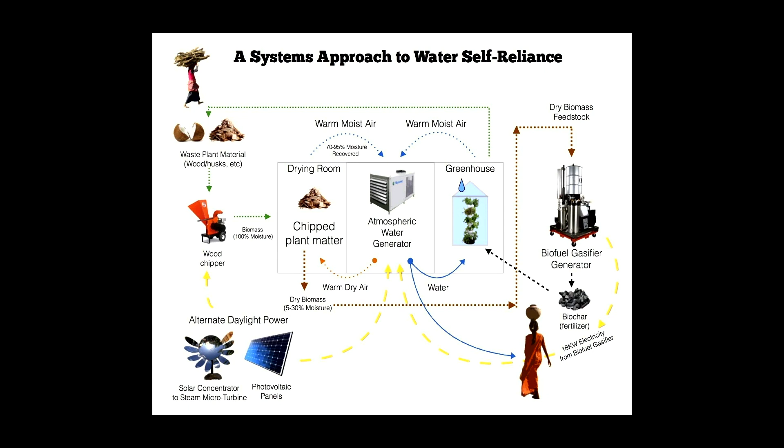We started to really look at this, and ended up building a machine to do a 72-hour test in Berkeley, California. We worked with some Stanford dropouts—one famous for burning down his dormitory exploring with pyrolysis, Jim Mason here, and his All Power Labs in Berkeley, a kind of renegade group of visionaries from Burning Man.

We had very little time. We didn't have time to raise money. We were actually excluded from the competition in the late phases, only to be entered back into the race with no equalization. So rather than coming at it from behind, we thought, well, now we have a stealth advantage. But to do this, we took out a $1.5 million loan on our house to fund it. And thank God we won.

Willem Swart, who I think is also here tonight, had just kind of entered the office and had a trial by fire learning how to sleep in a chair while working through the 72 hours. It was a huge test of the technology and the idea.

We won a number of awards, but it's not about the awards. It's about how we're going to address one of the fundamental crises on our planet, which is water scarcity. By 2030, water demand is going to outstrip supply by 40%. This is a massive problem. There's going to be a force multiplier that forces migration, warfare, and other things. I mean, besides air, what other hierarchy of needs is there besides water?

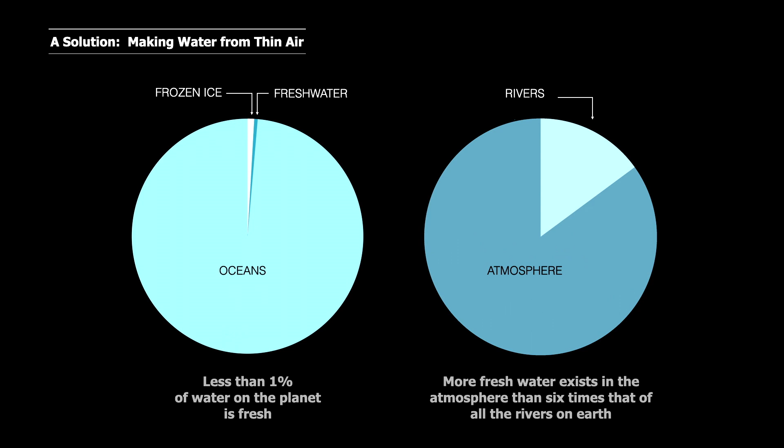However, six times more water exists in the atmosphere at any given time than all the rivers combined on the planet, in vapor form. You see it—those are clouds, that's fog—but there's also water vapor that you don't see. So Laura and I formed a company called Skysource to leverage the technology we used in winning the XPRIZE to make the WEDEW, which stands for Wood to Energy Deployable Emergency Water. It uses iconography symbols—alchemical symbols of earth, fire, and air—to make water.

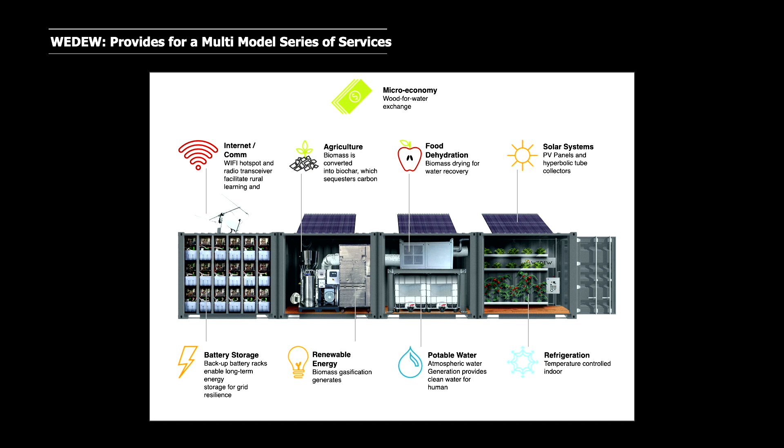They're in ruggedized, disused shipping containers that are easily transportable and have a series of different multimodal functions to them—a full suite of interchangeable and integrated kit of parts. So not only water, but high-density electricity, battery charging, cooling, communications, and rural learning. We see these as community resilience hubs, especially in the developing world.

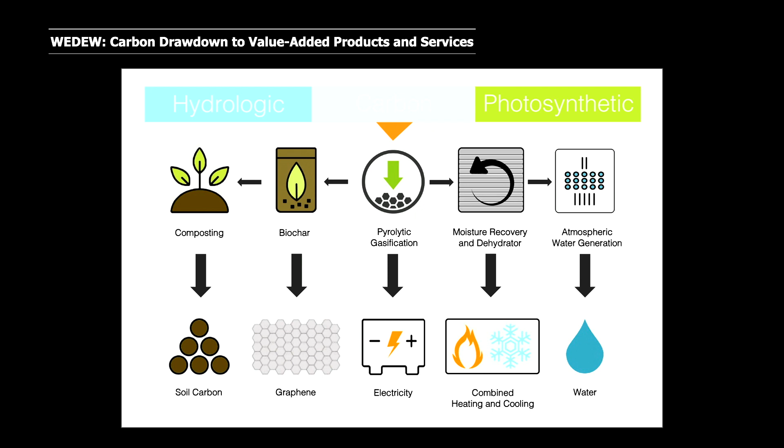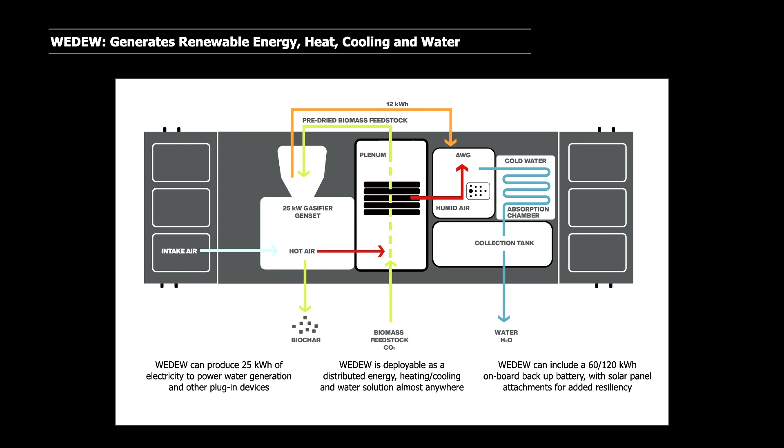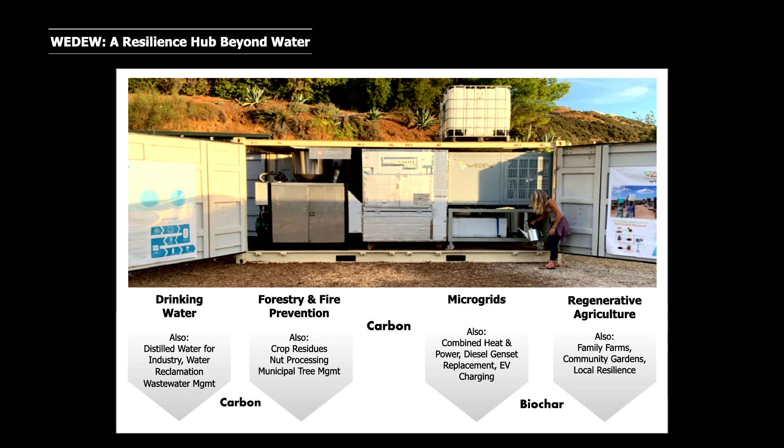We exist within large cycles—the hydrologic cycle, the carbon cycle, and the photosynthetic cycle. There can be a cascade of benefits coming out and other uses of biochar, including graphene and other amazing nanomaterials. I don't have time to go into the whole mechanisms, but it's basically using what nature does best through these simple laws of thermodynamics that are non-negotiable, to make potable water, to address biomass problems like fire prevention.

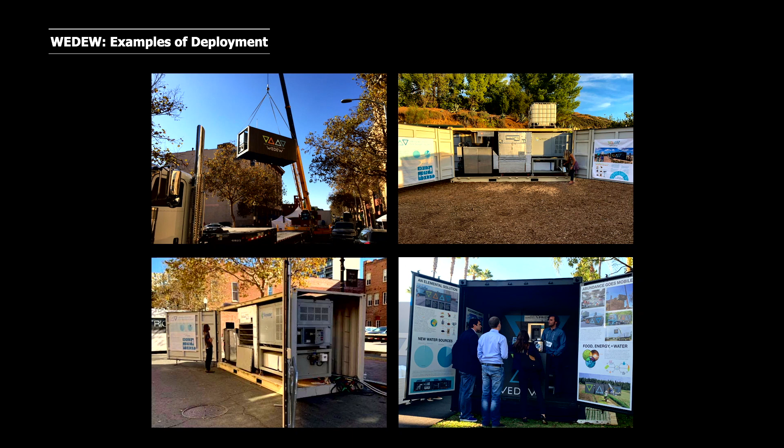To plug into microgrids, to be off-grid, or for regenerative agriculture. Small, not big, dispersed, not centralized, to scale up, scale down, and to swarm when needed. The hope is to create point-of-use solutions for localized opportunities, especially for women-owned collaboratives that normally would be walking for water and now could make water.

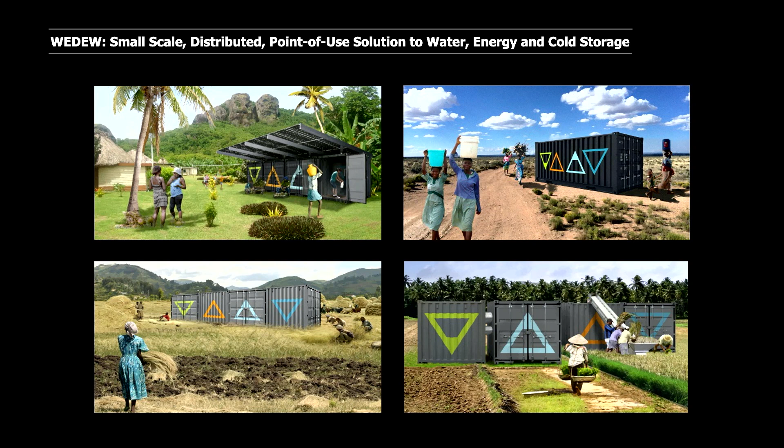It operates in its steady state of self-reliance, but is part of a larger climate adaptive and climate resilient practice, and then can swarm rapidly for emergency response. This is an example of anti-fragility, because of course if you have a hurricane, you have an abundance of wet biomass, and you need energy and water.

I chose tonight a topic, and fortunately it coincides with the Woolsey fire that occurred 5 years ago today, and we're in red flag conditions as we speak.

The definition really of resilience is the ability to restore a previously healthy state after trauma, the capacity to adapt to misfortune or change, the capacity and capability of a strained body to recover its size and shape after deformation caused especially by stress, and the ability to maintain stability.

So what are these phases? There are phases to resilience, and we think about this in the context of our own life. You should think about this in the context of what you're doing as students now, because you're in a growth phase. You're putting tremendous amounts of time, hard work, talent, and energy into the growth phase of your careers. At some point, there is a natural order to things, and there's a desire to hold on to that phase.